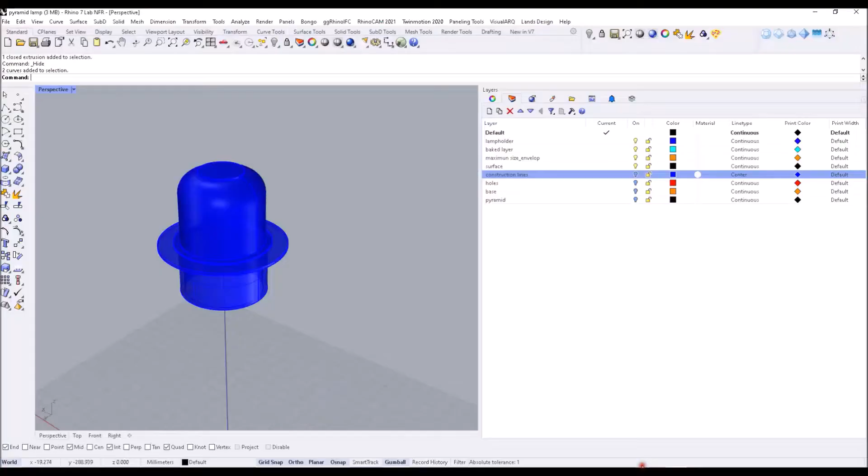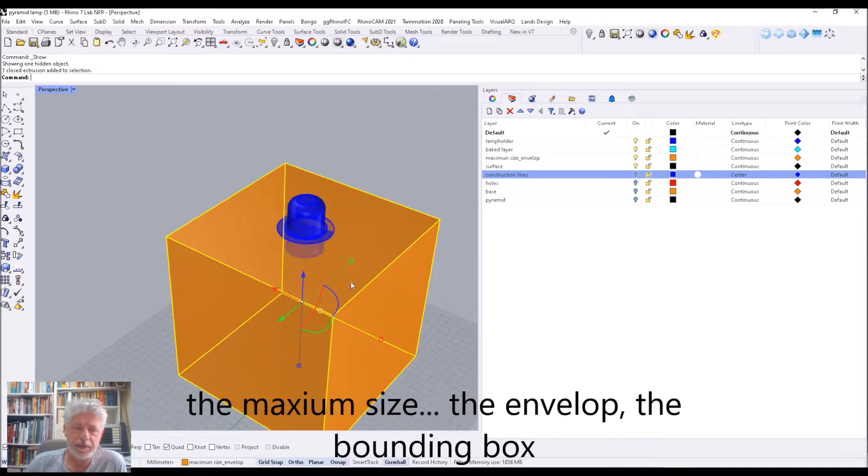So what we have here is the lamp holder. Yes. Okay, like I showed you before. So this is something important if you are going to design your lamp. Another important aspect here is your maximum size, okay? Otherwise your lamp is too big and you cannot print.

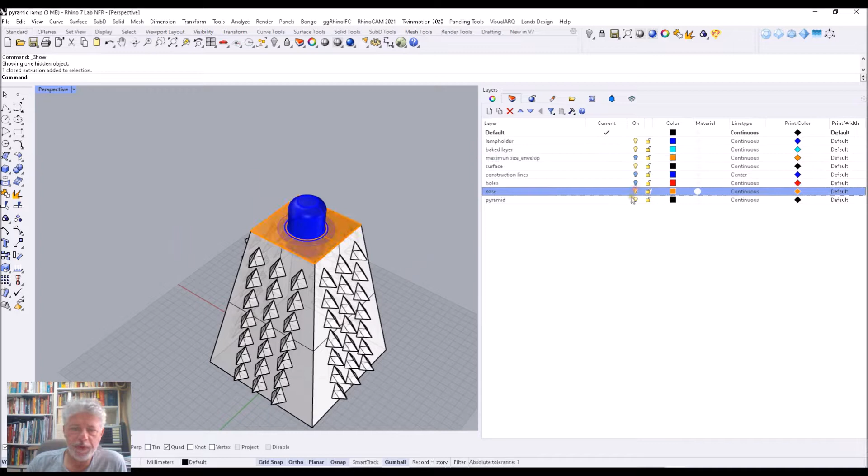What we developed here is this shape, okay? So let me hide my maximum envelope. I'm going to send you also the file, okay? And what you have here is just, let me turn off the lamp holder.

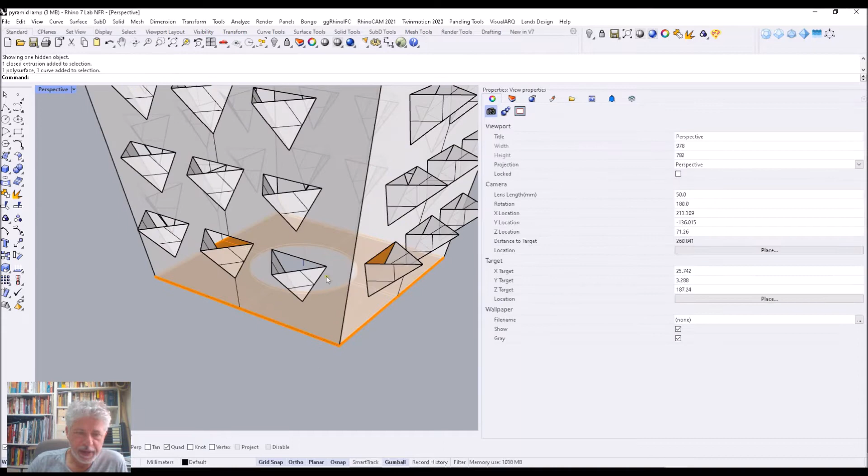Okay, so what we have here is a combination between some surfaces, this one. This is one surface, okay, and then here we have the base, which in this case is a solid.

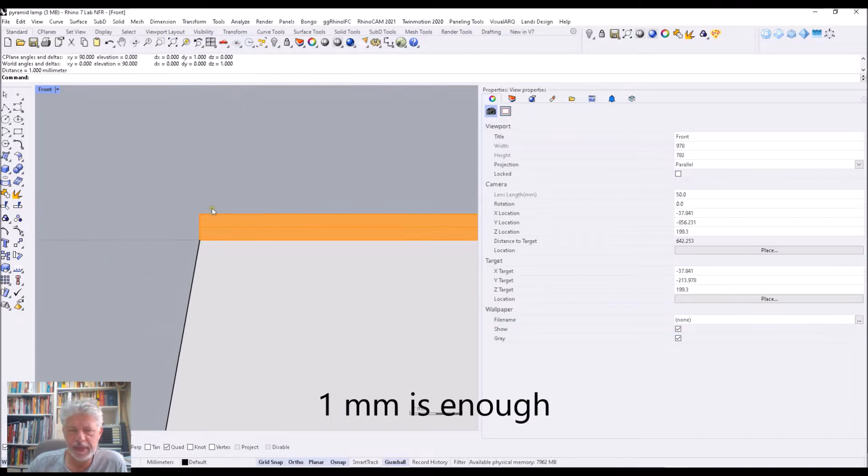Okay, and what is important with this technique is that you need to control the thickness that you have here. Let's check the distance from this point to this point. So my thickness is 1 millimeter. It is enough to get a really strong base. Okay, also this one is 1 millimeter. Of course, it could be 2, could be 3, but we are trying to use the minimum quantity of material.

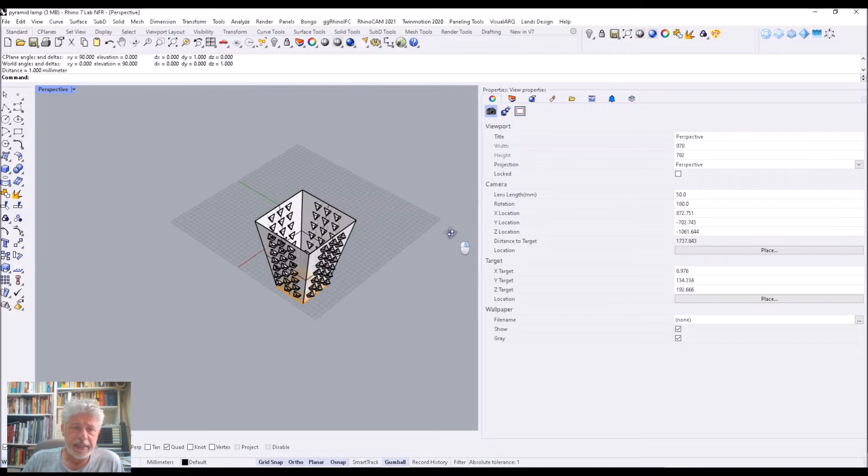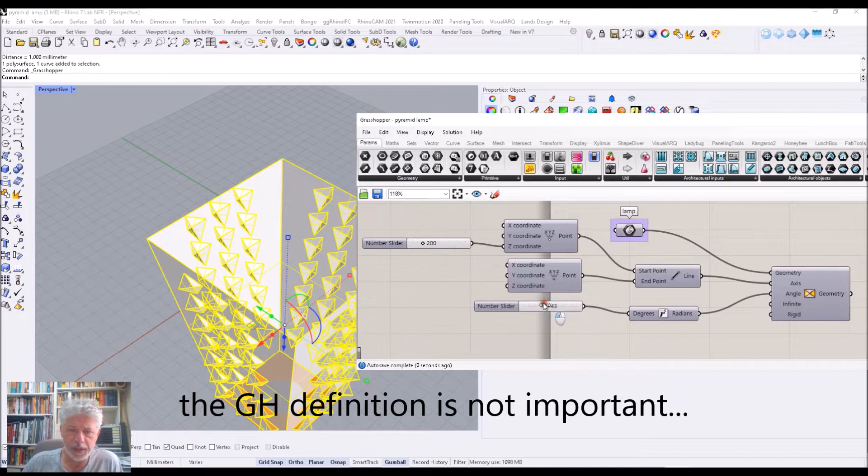So here the idea is to have surfaces and also solids, okay? Let me open Grasshopper. Also, I'm going to send you the Grasshopper definition that allows us to generate some twist in our lamp, okay? So I'm going to put here, let's say 45 or whatever degrees, and let me select all my definition in order to show you, okay?

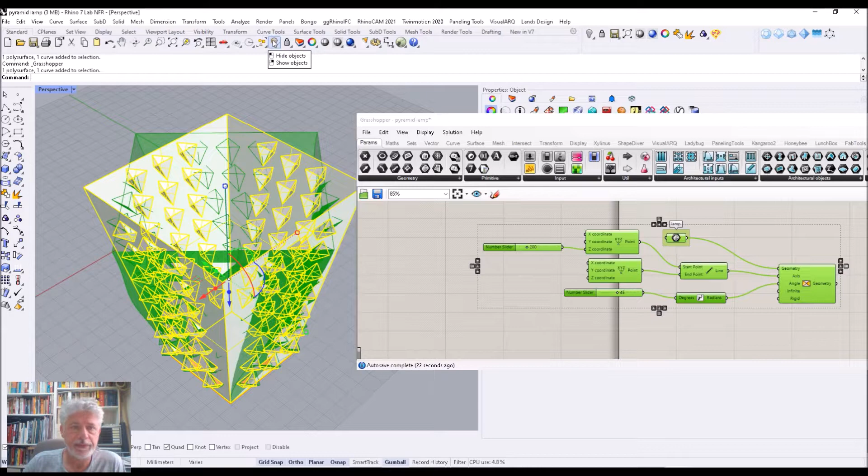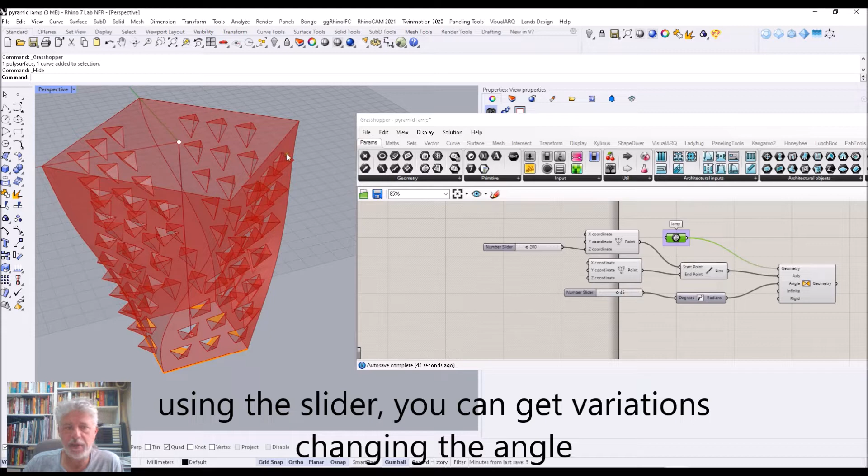And then I'm going to select my surface in Rhino, and then I'm going to hide it, okay? And also I'm going to hide here the original shape. This one. So this is the shape that you are going to print. Okay? So what is important here in order to get the shape in Rhino, because this is a Grasshopper object, is that you need to right click and then you need to bake.

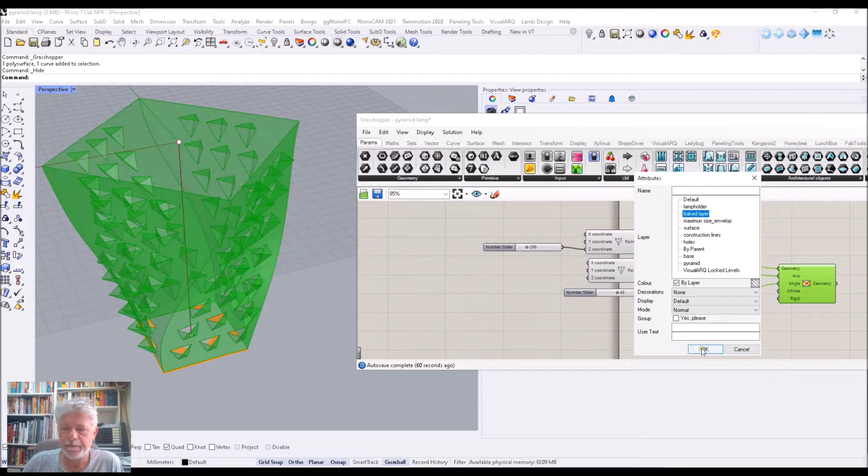Okay, so something that I suggest is to first generate one layer. Let's say, I think the baked layer is here. So I'm going to bake this to a specific layer. So I know where the geometry is, and then I can hide all my Grasshopper definition. So now the object, my lamp, belongs to Rhino.

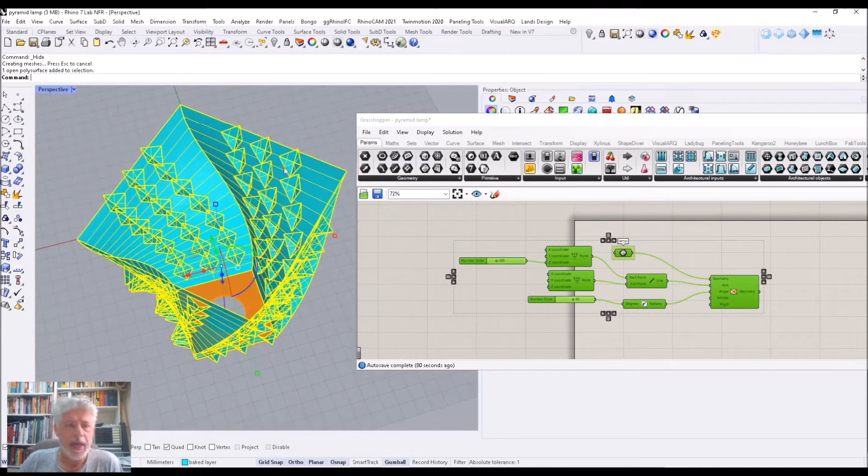Okay, and then I'm going to select both, I mean the lamp surface and the base, and I'm going to export both at the same time as an STL file.

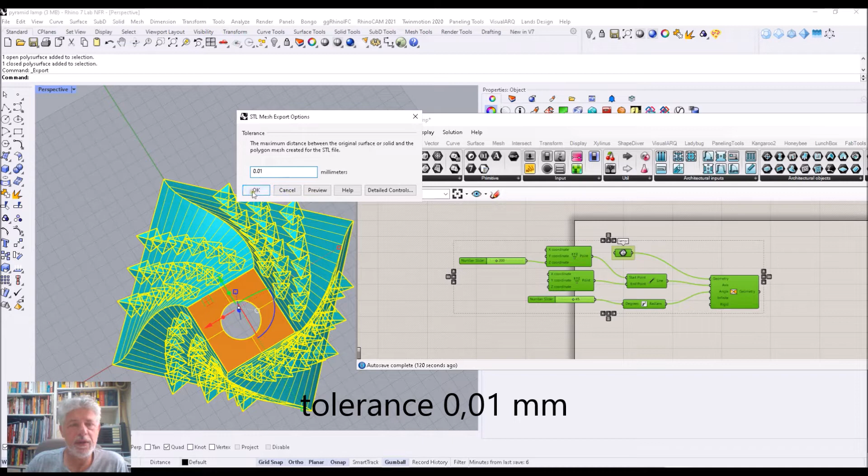And then let's put here lamp. I'm calling this pyramid lamp. Okay? And what also is important here is that the tolerance that I recommend you to work with is 0.01, so I get a really nice definition. Of course, you can play with this value if you want. So now we need to export also open objects, because my surface is an open object. And then we have the file.

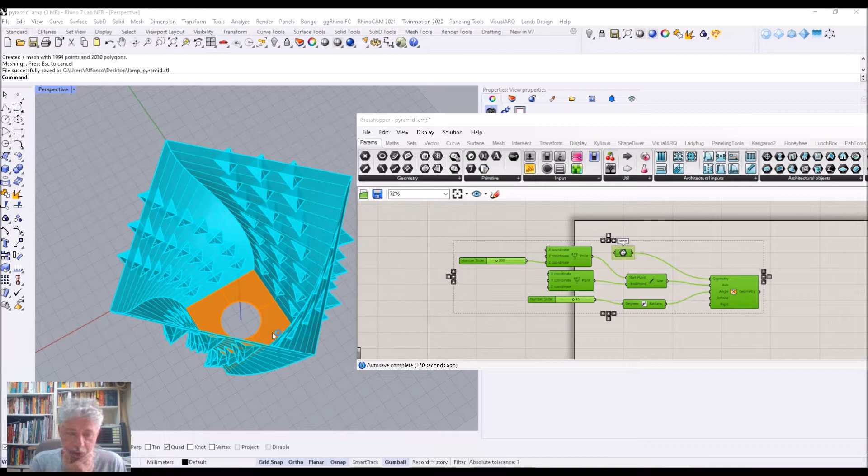Okay, so now I'm going to Cura. Let's go to Cura. I'm using the Cura version 4.11, but it could be any other version. So I'm going also to provide you some presets, some profile that can help you to go directly to Cura to load this profile, and then you just apply your geometry, and then you get your G code.

Okay, so the idea, of course, I recommend you to explore Cura if you have time, so you can get some new geometries there. You can play also with Cura, like I showed you before. This type of example just applies the fuzzy that is inside Cura. Okay. So let's see how to do that in Cura.

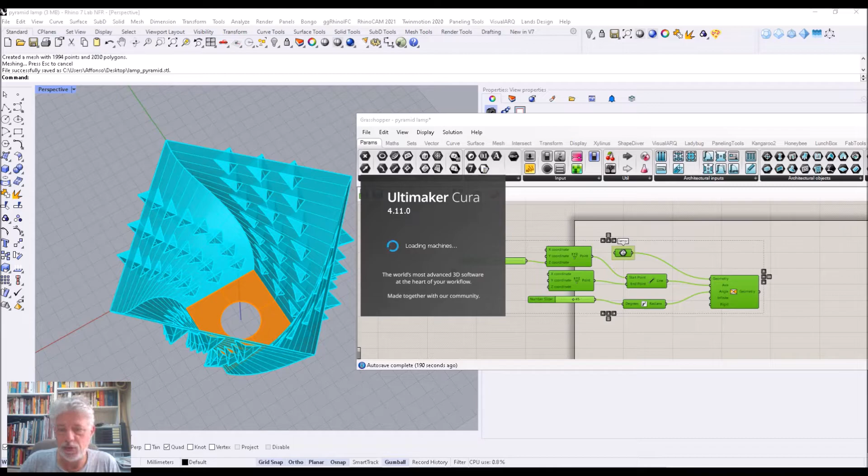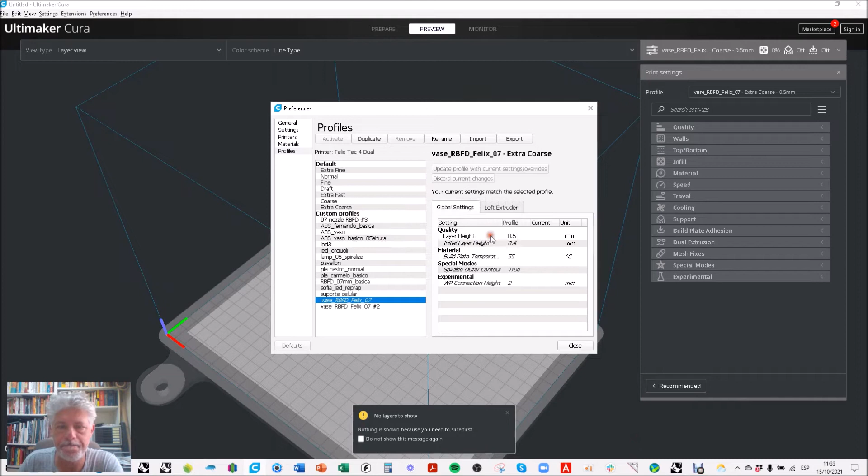So, okay, now we are here in Cura. I'm going to provide you the preset or the profile. You just need to come here in Manage Profiles, and then you are going to import the profile that I send you. Okay? Just this. You import the profile. Great. And now I'm going to load the part, my lamp. Open the file. It's the STL file that we created before.

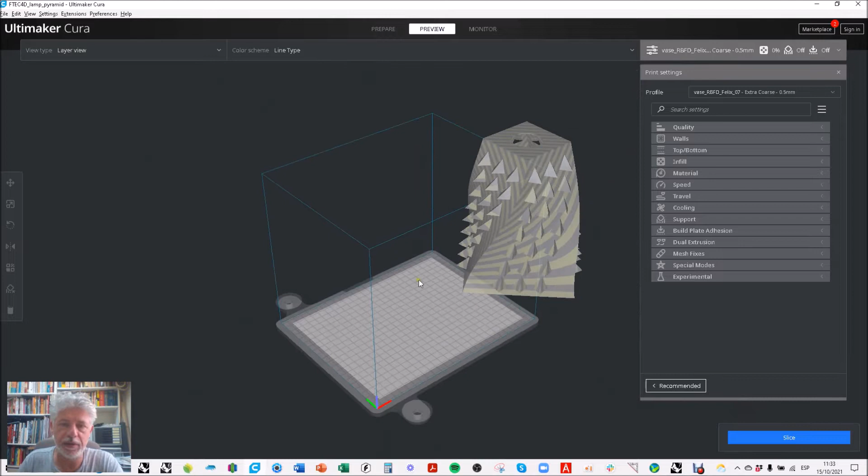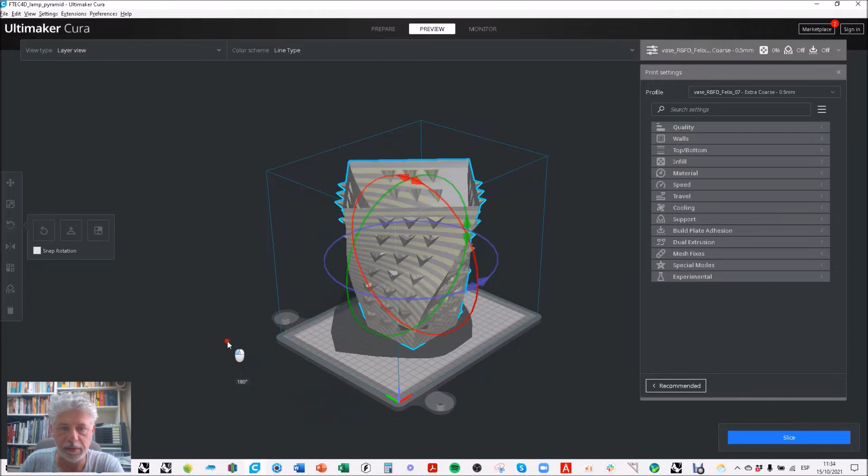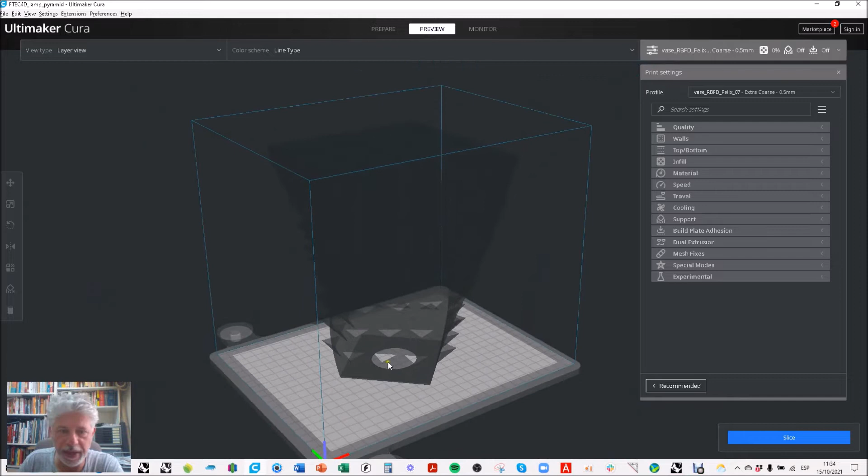So if you see that your lamp is outside your box, just select the object and move and put it here at the center. Also, if it's upside down, I need to rotate the object. I rotate here in this axis. Okay. And then also in this case, I need to rotate a little bit here. So now I have my shape totally inside my envelope. Okay. Once you have your object in the right place, you can submit this to the slice.

Let's highlight some aspects here. The layer height is 0.5. My line width is 0.7. This is included in the profile that I'm sending you. Okay, just check some basic information here. And then what is important here to highlight is that in special modes, the surface mode is activated, the Spiralize Outer Contour. This is important in this technique.

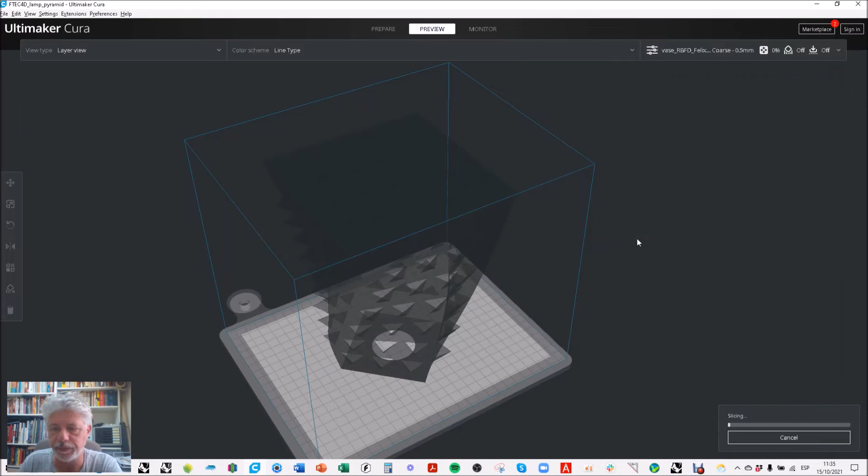So we slice, and then we get the information. There is 2 hours and 4 minutes to print the lamp. It's fast enough. Here we check the layers to check if everything is under control. I see here my first layer, and then I can go to the second layer, and so on.

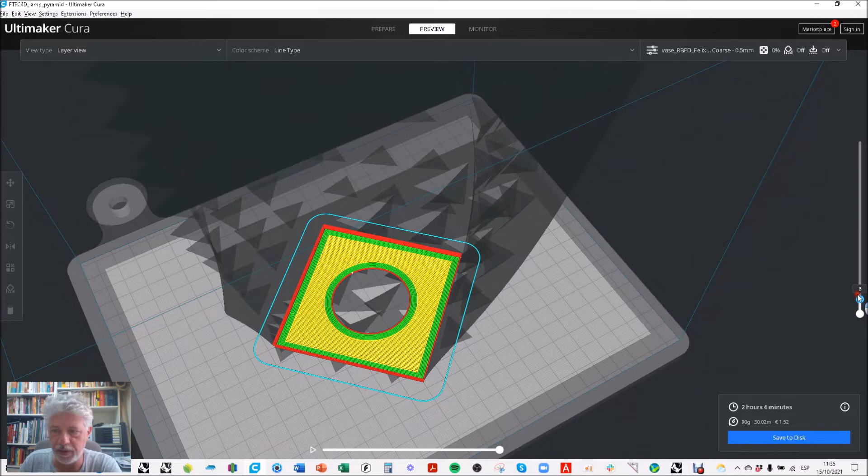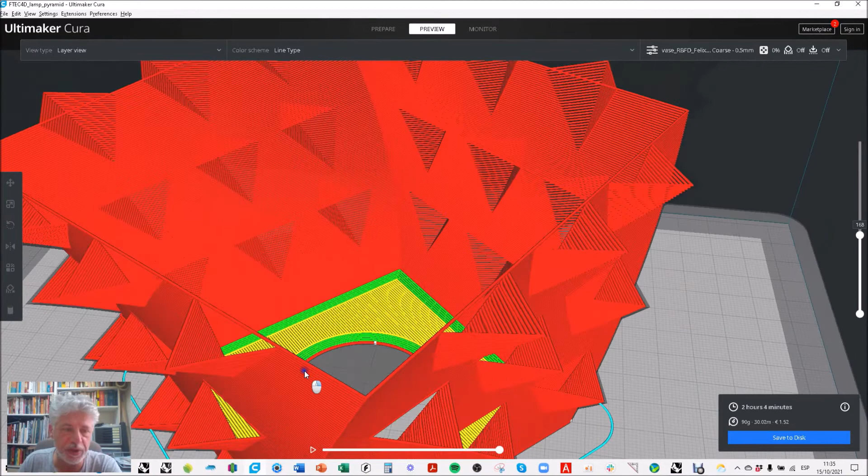And then let's see here our bridge. We call it the bridge. This is my bridge. Can you see this layer here? The next one, maybe? Yes. So this line is printing in the air. Okay. Since our distance from this point to this point is 2 centimeters, I mean 20 millimeters, this is not a problem. Okay, and then we save this to the disk.

Let's put here the name, it would be 3, and then I generate here my G code. Let's open the G code. You don't need to do that, but with a notepad, I see here my G code that I'm going to send to the machine.

Okay? I see here all the G1s, because the G code for 3D printing is just lines. So G1, X and Y, G1. So you see here a lot of lines that represent all the movements that the printer needs to do. Okay, you don't need to open this file, but for the curious, it's interesting. And then you just send it to the machine.